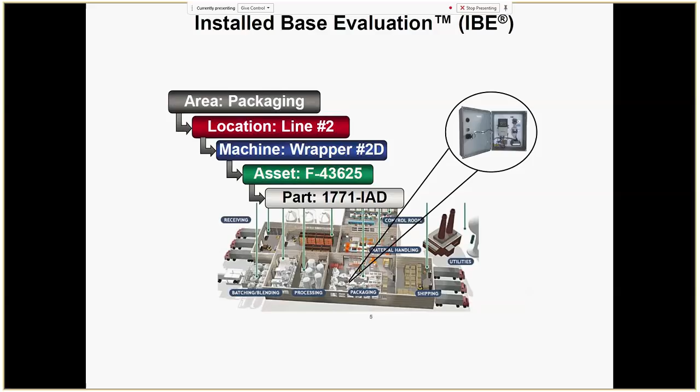So we've jumped into a little bit of an overview. Let's actually dig into some of the deliverables. If anyone has any questions on just what we went over briefly there, please let me know. I'm going to assume not, so we'll continue. So one thing to keep in mind is, we're only going to highlight a few key things here. Within the IBE, there is a ton of information to be covered. So we'll focus on a few of the things that we think bring some immediate value.

So first off, the IBE is delivered in two different ways. The traditional IBE deliverable, which is an EXE program, similar to what you're seeing here. Really, that pulls together all of the information and data that they have and gives you a nice interface to take a look at it. The other way is My Equipment, which we'll jump into a little bit after.

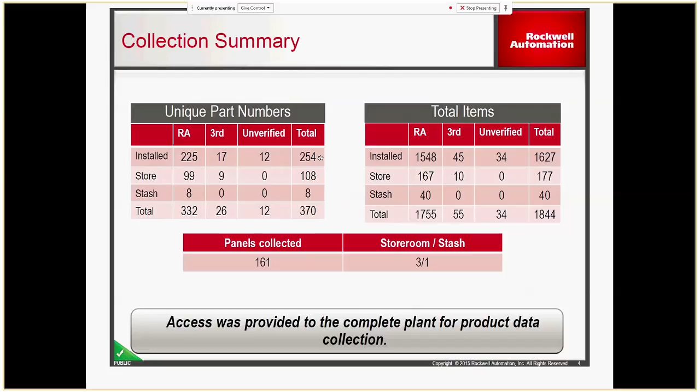So first off, we're going to look into the executive summary and some of the things that that provides. The executive summary is really a high-level overview of your IBE. So some of the things you're going to see there is your collection overview. How many panels did we collect? How many total items did we have? And how many unique part numbers were there out there? This will include, depending on what level you did, your Rockwell Automation and third party, or specifically just your Rockwell Automation.

Next, we'll jump into the evaluation of your automation equipment. So this is an overall view. So we have it broken down by your installed base. So what is the value of what's actually currently installed on your plant floor? What is the value of your spare parts? And what is the value of the stash inventory you have? So inventory that's not included on your installed base or within your spare parts storeroom, but might be floating around in panels elsewhere throughout the facility or somewhere else in maybe your automation manager's room, something that's just simply not accounted for.

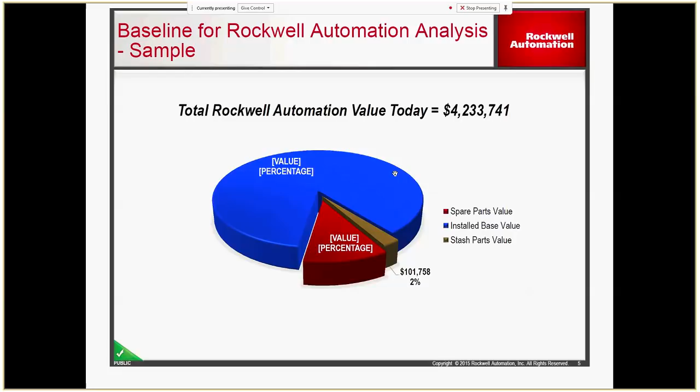Within that, we'll actually take a look at a breakdown of your spare parts. So giving you a valuation of those spare parts broken down by what's actually active. So active is actually installed on your plant floor. Excess active. So what is above and beyond what Rockwell recommends you to have for these spare parts? You have more in your storeroom than you need to have. Could we manage that and maybe lower that number down? Buy some additional assets that you guys actually do need.

And here in the red, you're seeing your inactive spare parts. So stuff that's not installed anywhere within your facility that you're actually holding on to in your storeroom. So really no need to have this inventory. If you have a sister facility, maybe you can send it there. You can find different opportunities to maybe write that off, other things like that. So how can we eliminate some of this additional carrying cost that you guys are incurring year after year?

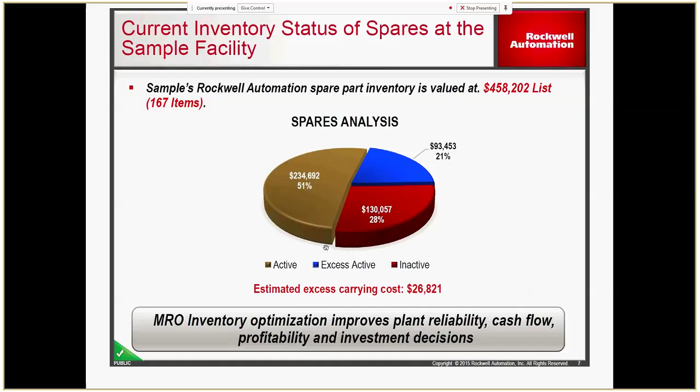Next, as we continue on the life cycle status, we're going to take a look at which of those locations have the most discontinued parts without spares. So if I have discontinued parts where I know I can't buy any more equipment for that, where I'm most at risk is going to be with those areas. So again, you see here biscuits processing in gray, 36 discontinued parts with no spares.

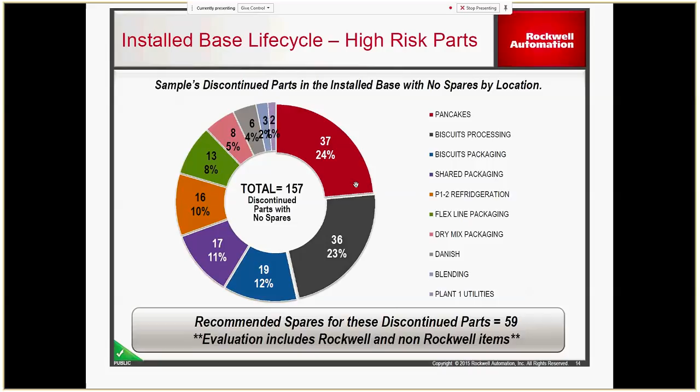Next, we'll take a look at the condition of our actual spare parts. So as we go through and we do our data collection, we're taking a look at the condition of those spare parts as well. So are they in good shape? Do I know that they're going to work next time I bring them out there? Is the condition in open packaging? It looks like they're still good, but hey, we're not 100% sure, the package is open. Let's make a note of that.

Used. Is this something that's already been pulled out? Is it going to work? We're not really sure. We'll put that there. And questionable. It looks like it's been used. It's maybe a little dinged up. We're not sure if it's going to work at all. So we put that as questionable.

And finally, we'll take a look at your stash inventory as well. Again, stash is generally stuff that has been pulled out or used somewhere else. So you'll see a lot of this is going to be as either other or used condition. Generally something that we won't really trust to put on our plant floor.

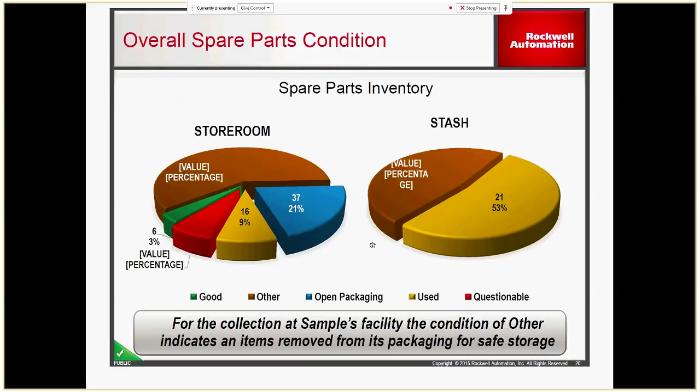Finally, going through the summary overview, the last thing we look at is the panel condition, specifically environmental conditions. Is there any water ingress, dirt, so on and so forth getting in there? How does the wiring and grounding look? Ventilation, is it in a really, really hot area? Does it need an air conditioner? Does it have ventilation? Is it building up humidity? So on and so forth.

So now that we've kind of gone through the high-level overview, let's dig into some of the actual deliverables here. Does anyone have any questions on the stuff we just jumped into, or can we continue moving forward? Assuming no questions, we'll continue going forward.

So as I stated a little bit earlier, we're going to focus specifically on biscuits processing for this example. So there's a number of different machines within biscuits processing. Specifically, what we're going to take a look at is our line 1B sheeting. So it's 72% end of life or discontinued, which obviously is pretty high. So an area that we would maybe want to focus on as we're going through.

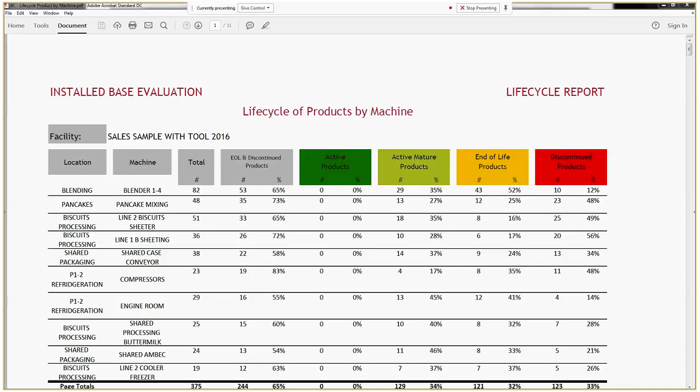This just gives our customers the ability to really easily communicate what they're looking at. So if you have a plant manager who is remote and you have a plant technician on the floor, they can have a conversation of exactly what they're looking at, be able to point to specific areas of the panel and really figure out, hey, listen, if we need to add a switch or add something to this, do we have the room for it, and can we have a real actual conversation about it that makes some sense?

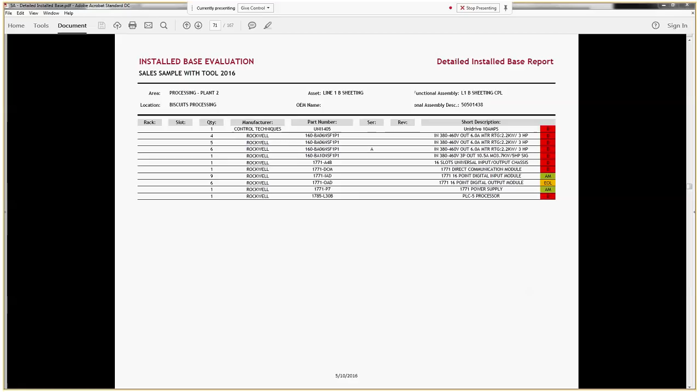So if we want to find a little bit more information about this panel specifically, we can actually dig into this Excel sheet here. Again, I've already pared this down, so I went from looking at the entire facility down to just biscuits processing, down to line B sheeting, and down to the asset itself. So what we're seeing here is we've got a bunch of drives, 160 drives that are discontinued. We've got a bunch of PLC 5 and a few other things here as well.

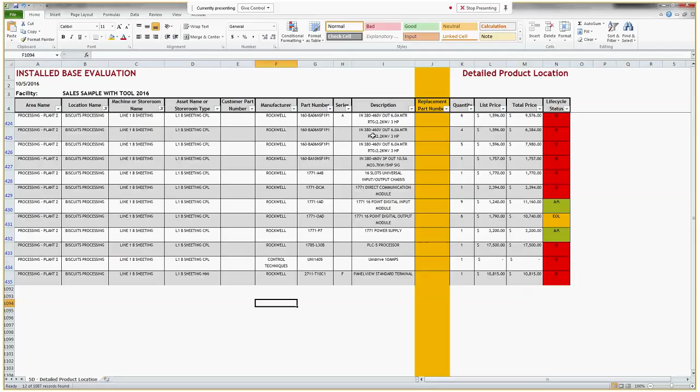Now, one of the things I do want to point out is this was a sample IBE report, so some of the information is going to be missing. One of the things that we would highlight here generally is the replacement part numbers. If Rockwell does have a replacement part number for a specific item, they'll add that here, and we can help you immediately look for a migration path for that.

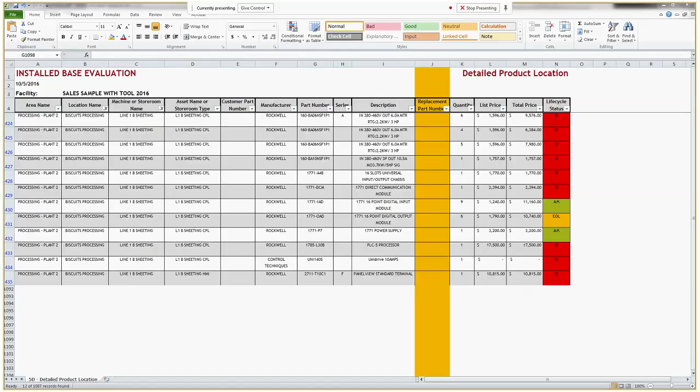Finally, one of the things that I want to just point out really quickly is once you get to this point and you understand what you have and what you want to look at, we can really start digging into, okay, well, what do we have in our storeroom to compare to what we actually have on the plant floor? So again, I've jumped a little bit ahead of myself and jumped into some of the 160 drives. So here we're getting a little more additional information on that.

So again, replacement part number would be highlighted here, our overall installed quantity compared to our recommended spares, and then our storeroom spares. And again, this gives you some other information there as well, including some excess stuff. So some of that excess inventory that we spoke about earlier would be shown here. This also gives you your list price, recommended prices, insufficient stuff. A lot of information here. I won't dig into everything, but just to give you an overview.

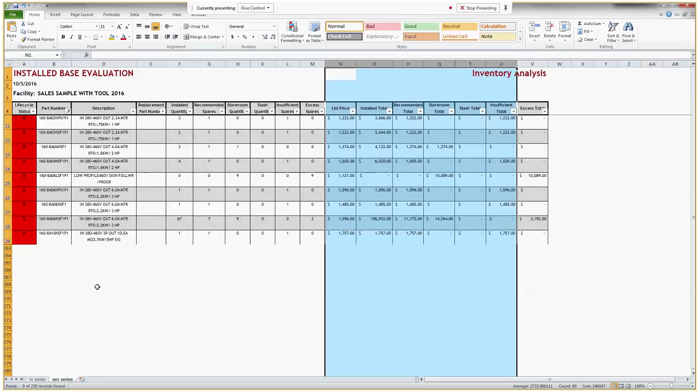So you've heard me mention My Equipment a couple of times. So what exactly is My Equipment? My Equipment is a nice little tool that they've added to the IBE to make it easier for our customers to really use and share within their organization. So some of the key benefits are, again, it's ease. Very easy to use, easy to move around, and everyone can pretty much use it. It can be accessed at any time. You can share it throughout your organization.

So you have one person within the organization who really holds the keys to it, but all you have to do is give them your email address and they'll sign you up for it and you'll have access to it as well. One of the other key features is it has a live lifecycle update. So as equipment goes through the different stages of its life cycle, specifically from active mature to end of life or end of life to discontinued, you'll actually get an update on that.

So as you can see, My Equipment brings a lot of the same information to you, but can we actually navigate this in the same way? So let's jump into that a little bit. So one of the things we'll look at is life cycle. Again, we're focusing on that a lot here. And I just mentioned to you that the IBE tool on My Equipment will actually give you a live update of that life cycle analysis.

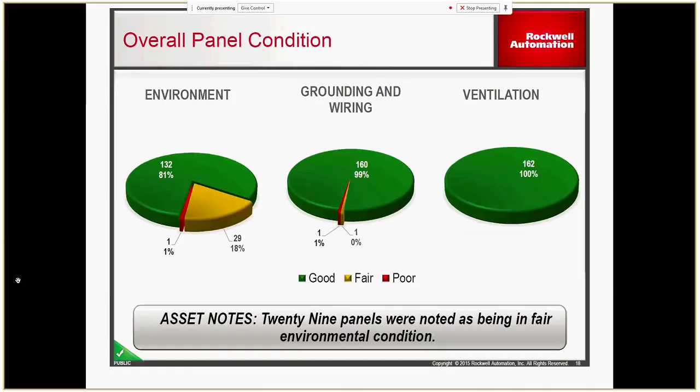So do you have an accurate plant model that identifies all physical assets in your plant? Do you know which parts are still being manufactured? Do you have the right spare parts if a critical machine goes down? Do you have an updated, complete bill of materials for your critical assets? Do you know which parts have been announced for discontinuation or are already discontinued? And do you have an efficient and accurate process for maintaining storeroom inventory?

So really the questions all boil down to the same thing. Do you have a real understanding of what is installed in your facility and how to support it? If not, please allow us to jump in and give you a hand. An IBE is a great tool to have at your disposal and helps you to align your organizational goals with what is actually happening on your production area.

But finally, to build off the IBE, I want to introduce Dennison Dukovic. He's our service technician here. He'll be introducing Rockwell's remanufacturing and repair programs. An IBE can simply uncover your obsolescence risks, but we understand you can't migrate everything at once. In order to support that stuff and keep your facility up and running, this is a great service to utilize and something that we really need to make sure our customers are aware of going forward.

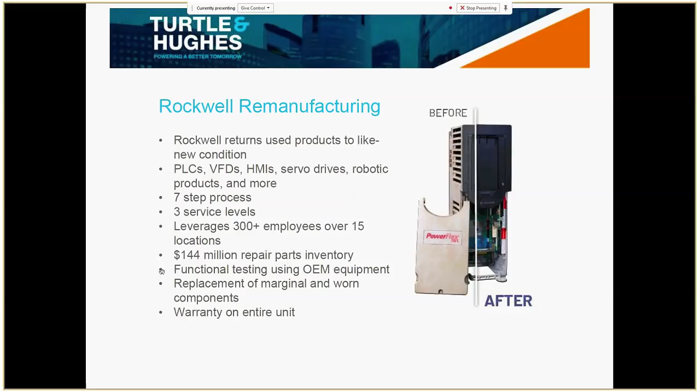So remanufacturing is a process by which Rockwell returns a used piece of Rockwell equipment to like new condition. So they can handle PLCs, VFDs, HMIs, servo drives, and robotic products, and more. So the asset's taken through a 7-step process with 3 different service levels to choose from. Rockwell leverages 300 employees across 15 locations and over $144 million of repair part inventory. With remanufacturing, the part is given a minimum of 1-year warranty, and it's on the entire unit, not just the components that are replaced.

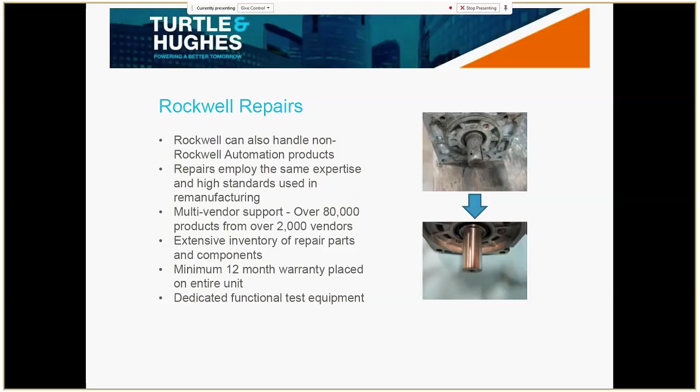And getting a quote is really easy. You can either call me or email me, or just log on to myrockwell.com. You go to the repairs tab, and here you just fill in some information on the part, submit a couple pictures, and hit submit. Rockwell usually gets back in 24 to 48 hours.

And then finally, we have the CHAMP program. This is the Channel Asset Management Program, which is a strategic remanufacturing and repair relationship with customers. This is good for somebody who has a large install base and needs a better handle on their spares and broken down parts. So the way it works is we tag the asset. This allows us to follow it from the storeroom to the plant floor to remanufacturing.

I would visit customers at regular intervals and pick up their repairables, and then I would send them out to Rockwell. I'd be helping the customer stay on top of their working spares and preventing them from piling up broken down parts. By tracking the assets, Rockwell can provide repair frequency and spend information for the customer. They can even do an in-service warranty for the product that only goes into effect when it's taken out of the storeroom. So this is a great way that we can help a customer streamline and stay on top of their repair part inventory. And that's it.